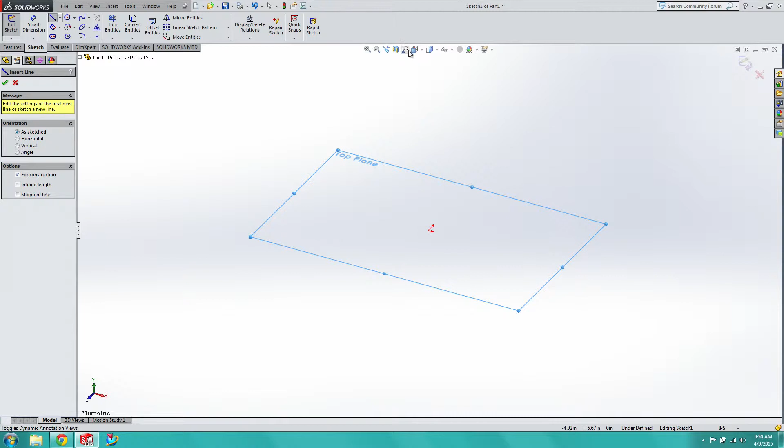It's because, first of all, I am a famous procrastinator, so I've spent a lot of time just sitting around procrastinating against doing more videos.

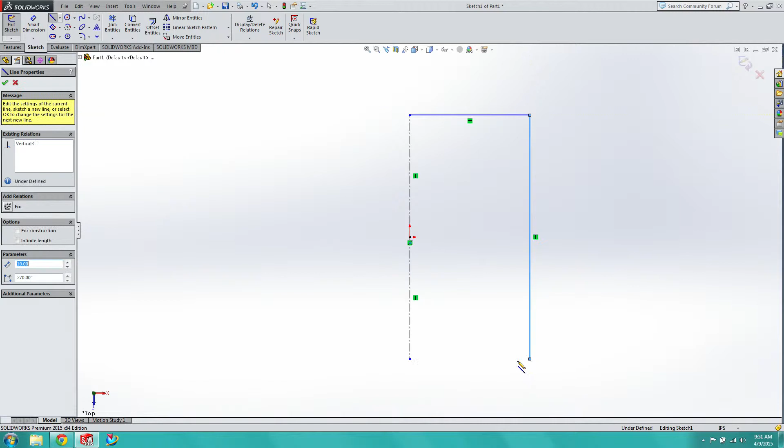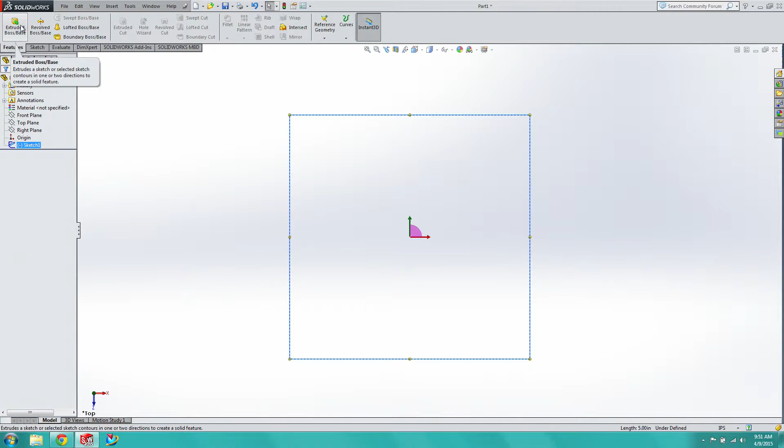So what we're going to do is punch a big square. Then we're going to delete these centering lines, exit the sketch, and extrude this up an inch.

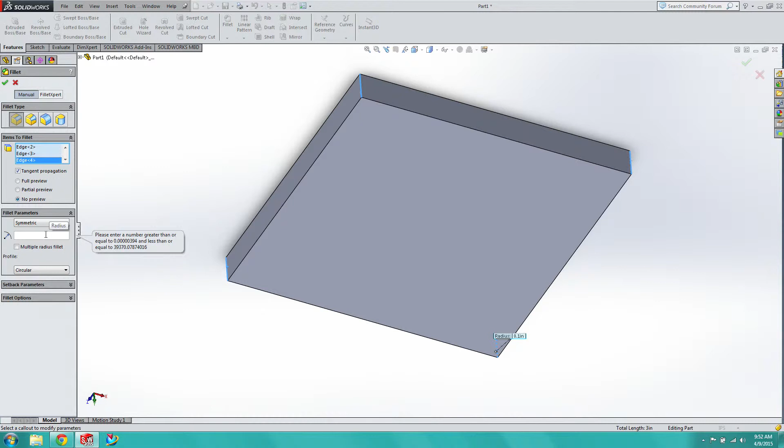The reason I'm flying through these processes right now is because these are pretty much standard SolidWorks maneuvers. Nothing's changed from this video to any of the other videos, so that's why I'm brushing over them fast. If you need reminders on those concepts, the other videos are always up to watch.

Now what we're going to do is put a bunch of center lines on, and the reason we're doing this is just to help center the hole that we're about to make. So now we have that in place.

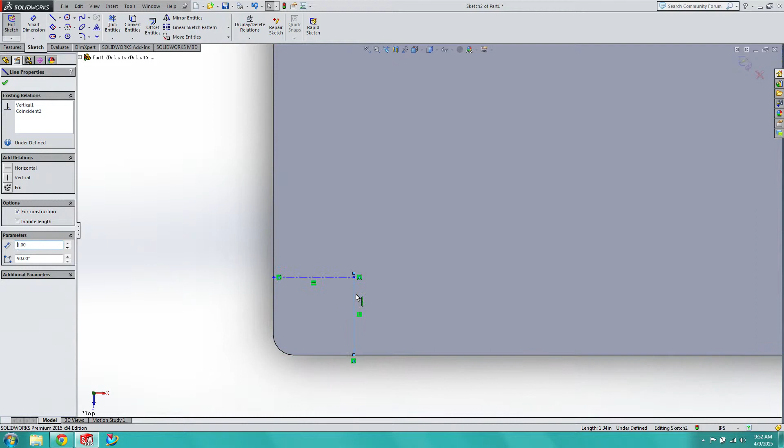Let's make a circle. In the first iteration I did of this video, I decided to make it half-inch diameter. Nice, clean, simple, good for tutorial purposes, and still easy to follow.

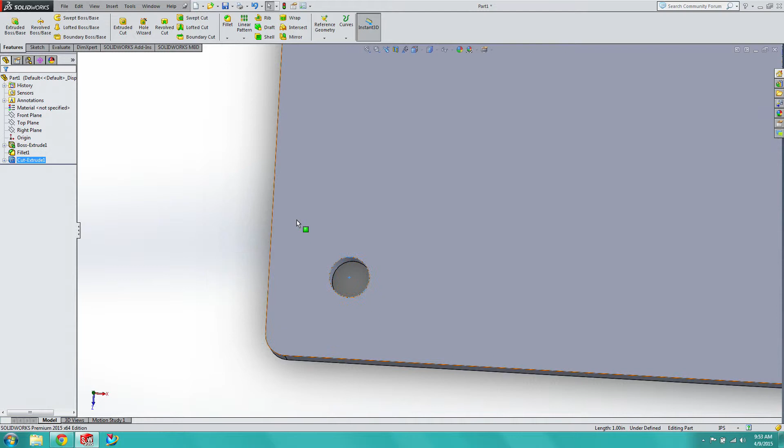This is one of the things I always do, I always make sure the hole actually punched out correctly. Now we're going to select the hole, select the extrusion that we just did, and select linear pattern.

We might as well move back to the isometric view so we can see what's going on. Now you're going to see this direction option and wonder what to do with this. There are many different things that could qualify as a direction in SolidWorks. The most obvious to you will be to click the side.

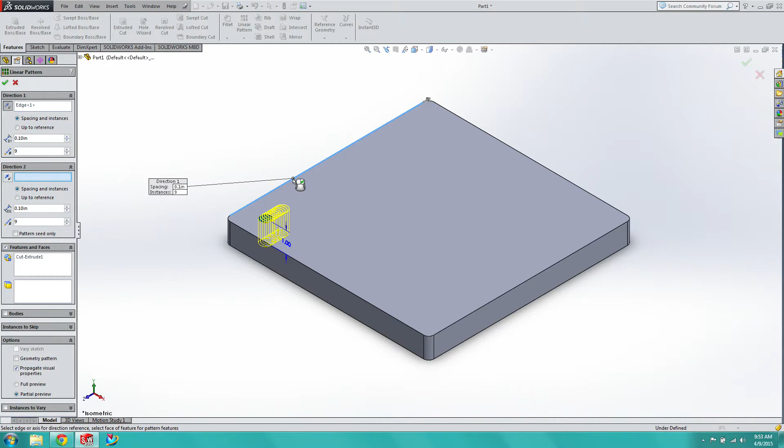You'll notice the spacing is much too close and we're packing a lot of them in there. So let's adjust the spacing, we'll go back down to 1 just so I can walk you through it again, and we'll go 1 inch on the spacing.

Now watch what happens as I increase the number of instances right here. You'll see that SolidWorks automatically patterned them out, so we can fit 9 in that area.

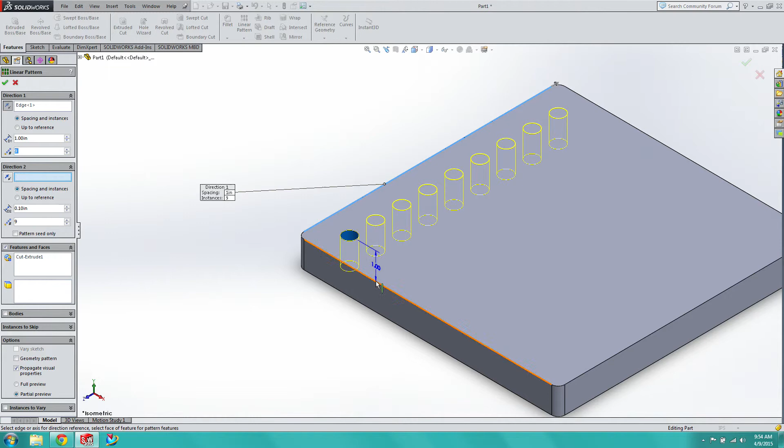Now what SolidWorks allows us to do is create multiple patternings at once. So we can take these 9 holes we're about to make and do them in the other direction in a single step. We wouldn't have to take this and then linear pattern it again this way, we can simply select this direction and it will automatically take care of it for us.

So then, of course, click that, and then, as you know from my previous videos, deciding to put a fillet on every hole in the face is as easy as selecting the single unifying face, essentially the common face between all these holes, and just going like that.

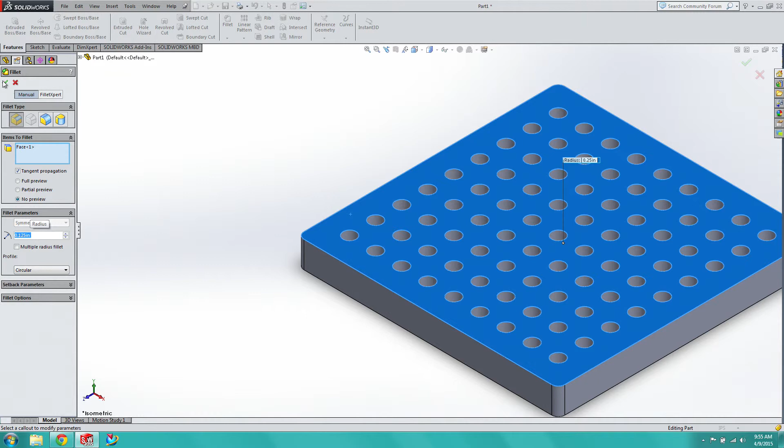In about 5 minutes and 51 seconds, we've basically created what would take a long time to do in other CAD programs. So that's going to be it for this video.

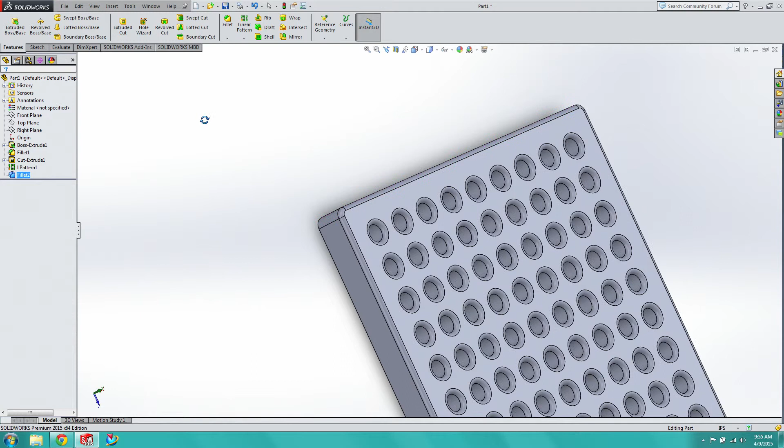The next video I have planned is something where we're actually creating something, a rocket nozzle injector, essentially the end cap for a rocket nozzle combustion chamber. I don't know why I decided to pick that, mainly because I'm trying to study aerospace and thought it'd be cool to do. I made it up myself one night in SolidWorks and figured it'd be interesting as a tutorial. It's going to really help you get the hang of extruding and circular patterns, bringing you up to proficiency in those two things.